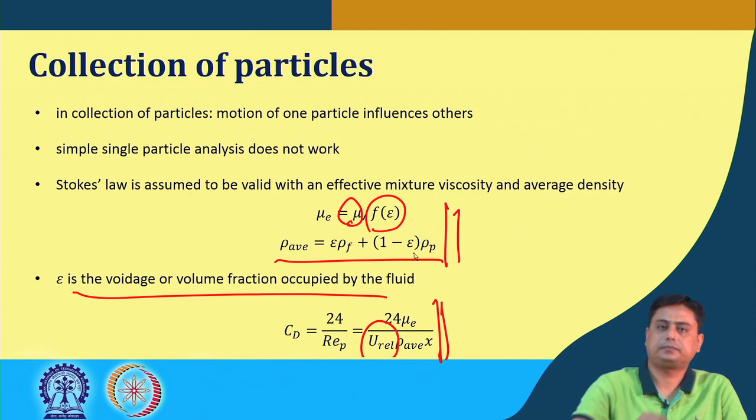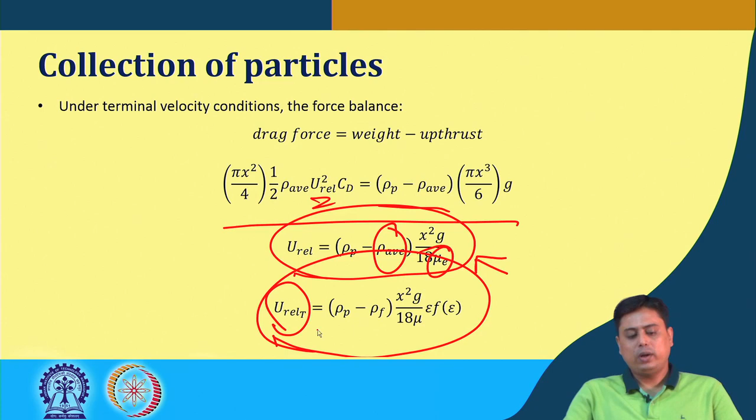Now, if we replace these two expressions in this equation, we find a simplified relation in terms of the particle dimension, the voidage, and the relative density of the fluid and the particle, where this is the relative velocity at the terminal velocity condition. Now let's compare this expression with the single particle system: this one is for the single particle, this one is for the multiple particles.

Comparing them, we find that this relative terminal velocity is the single particle terminal velocity multiplied by the void fraction, the fraction of liquid, multiplied by a function dependent on the voidage. This is called the relative velocity at the terminal condition, or specifically the hindered settling velocity, because there are multiple particles in the medium, considering the interparticle interactions and crossing of flow paths. The presence of one particle hinders the movement of the other, which is why it is called the hindered settling velocity.

Now, if we assume that the fluid and the particles are incompressible, which is logical in most cases except for gas as the fluid media, and if we assume a constant volumetric flow rate, where F stands for the fluid and P stands for the particle, then UFS and UPS are the superficial fluid velocity and superficial particle velocity respectively.

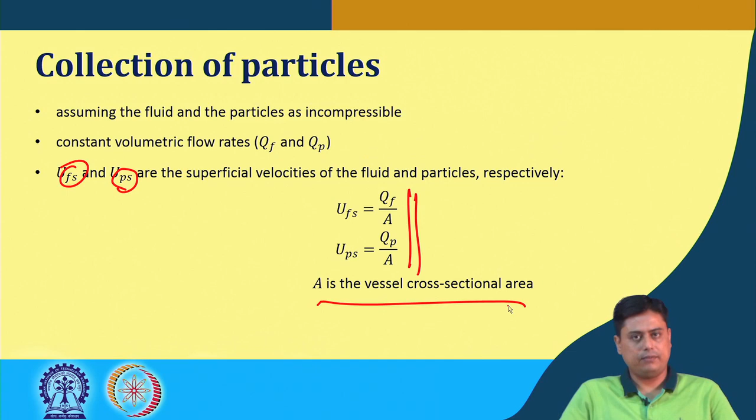Then this UFS and UPS can simply be written in this form, where A is the cross sectional area of the vessel or of the container where this phenomenon is happening. Then the flow area occupied by the fluid is AF, which is the voidage multiplied by the overall cross sectional area, and the flow area occupied by the particle is the solid fraction multiplied by the cross sectional area.

And since the flow rate is the same, and assuming, as I mentioned, it is an incompressible fluid and particle system, we can write such continuity expressions: the superficial velocity multiplied by the cross sectional area is equal to the actual velocity of the fluid, UF, multiplied by the flow area through which it is flowing. Basically this is UF multiplied by AF, where AF is epsilon multiplied by A.

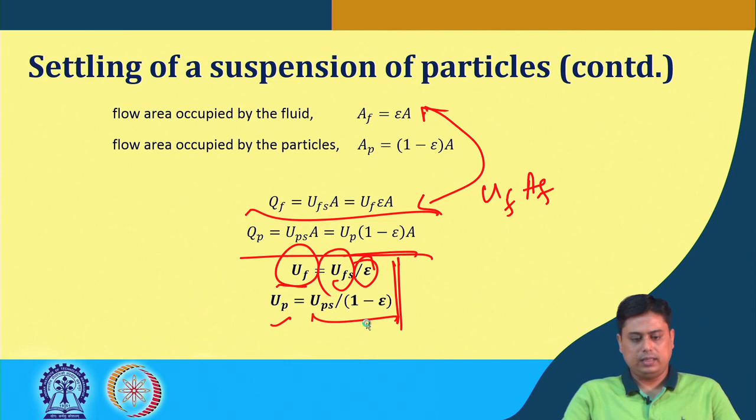Similarly, for the particle phase we can write this expression, which means we came back to these expressions we already know: the actual velocity is the superficial velocity divided by the respective volume fraction. So, similarly, the actual particle velocity is the superficial particle velocity divided by its fraction. So, what we have realized here is how this relation between the terminal velocity and this factor appeared. Okay.

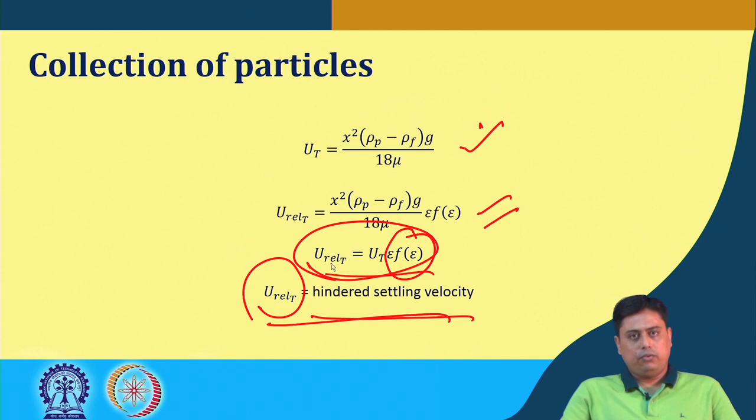Now, if we carry on with this concept for fluidization: in non-bubbling fluidization, beyond the minimum fluidizing velocity, the particle separation increases with increasing superficial velocity, but the pressure loss across the bed remains unaltered during bed expansion. If we relate this to the previous case, where particles are settling in a fluid media and both are flowing downward, the relative velocity, particle velocity minus fluid velocity, is the terminal velocity of a single particle multiplied by the void fraction multiplied by a function of the void fraction due to the presence of multiple particles.

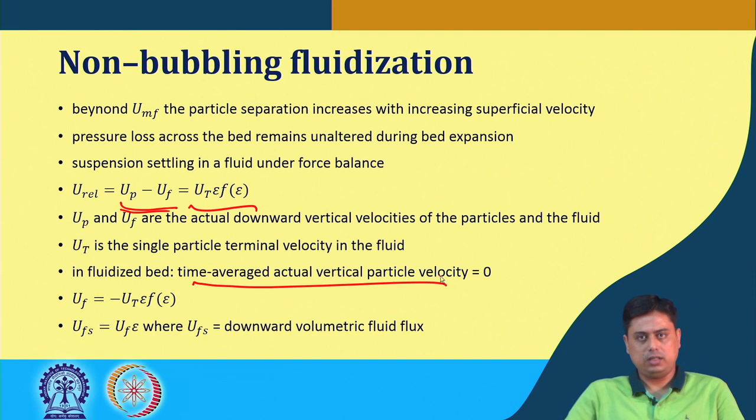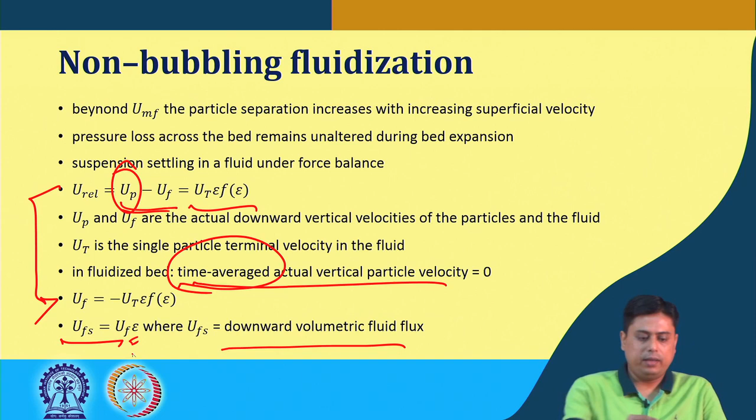Now, in a fluidized bed, the time averaged actual vertical particle velocity is 0. If we take the time average, UP is 0, and the expression simplifies to UF equals minus UT epsilon times the factor depending on the voidage. Again, the superficial velocity, or the downward volumetric fluid flux, is the actual velocity multiplied by the voidage. Applying it here, the downward volumetric fluid flux becomes minus UT epsilon squared multiplied by the factor that depends on the voidage.

Now, this is the case for downward movement, the analogy of settling multiple particles in a fluid media. The negative of this downward motion is the upward motion in the fluidized case. So the superficial velocity in a fluidized bed is the negative of this downward volumetric fluid flux. In a fluidized bed, the superficial velocity equals the particle terminal velocity multiplied by epsilon squared multiplied by the function of voidage.

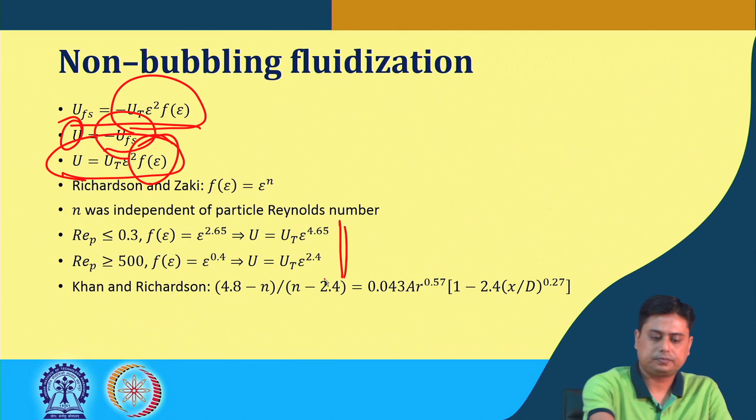Now, Richardson and Zaki proposed a relation to find this factor applied in both cases, hindered settling and fluidization. They found that n was independent of particle Reynolds number, with a value around 2.5. But for better accuracy over the complete range of particle Reynolds number, below 0.3, in the Stokes region, n is 4.65, and for larger than 500 it is 2.4, which gives the expression for u with ut: epsilon to the power 4.65, and epsilon to the power 2.4 when particle Reynolds number is greater than 500.

Khan and Richardson proposed a relation applicable for a wide range of particle Reynolds number, which introduces the vessel diameter and the particle diameter, so the influence of equipment size comes into play in calculating n. So, similar to other expressions I mentioned, correlations are available to find these required parameters. Once we have them, we can find the relation between epsilon and the fluidizing velocity in non-bubbling fluidization, that is, the relation between u and epsilon.

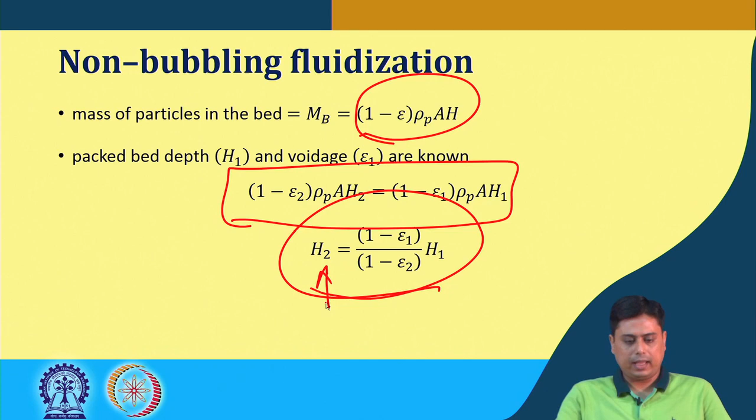This is how we can calculate the bed expansion height in case of non-bubbling fluidization by these relations, and these relations are important. Similar to these expressions there are other relations available. Several researchers have proposed these relations in a different way. These are the correlations.

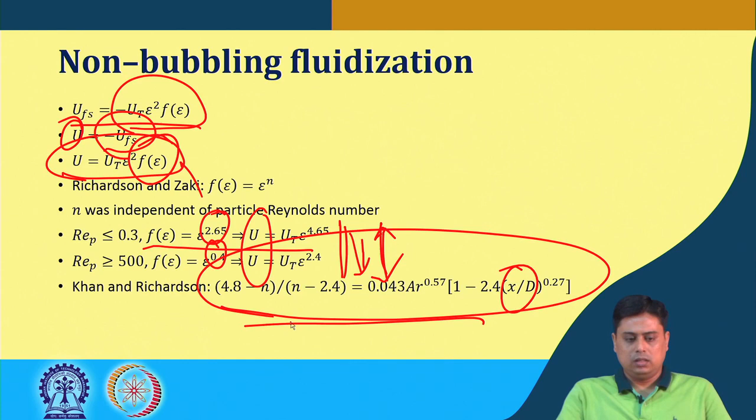Now, in case of bubbling fluidization, the expansion has been best described by a simple theory proposed by Toomey and Johnstone. They proposed that in bubbling fluidization we have two phases. One is the bubbling phase, the other is the particulate phase. The bubbling phase is mostly the gaseous phase, and the particulate phase around the bubbles is also called the emulsion phase.

Their simple theory is that any gas provided in excess of what is required for incipient fluidization will pass through the bed as bubbles. What is incipient fluidization? It is the beginning of fluidization, or the minimum fluidization, just the onset of fluidization. So, anything that you supply in excess of what is required for fluidization passes through the bed as bubbles.

Now, this is a simple schematic illustration for Geldart's group A powders when air is flown through this stack of particles. This is what happens just above the minimum fluidization velocity, and in this case, when it is sufficiently higher than that, more gas is passing through the bed as bubbles.

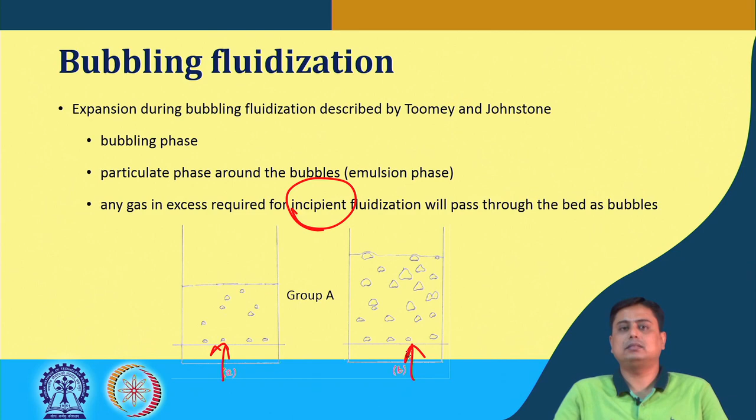Now, considering this scenario, let us say this Q flow rate was required, or UMF is the minimum fluidization velocity. If this is the minimum fluidization velocity required for this bed of height HMF and cross sectional area A, and we actually supply U multiplied by A, where U is the actually given superficial velocity.

So, the gas flow through the emulsion phase is QMF, and the gas flow as bubbles is QB, which means the gas flow as bubbles is Q minus QMF. QMF is what goes through the emulsion phase, and Q is what we are supplying for this fluidization, which is higher than the minimum fluidization flow rate.

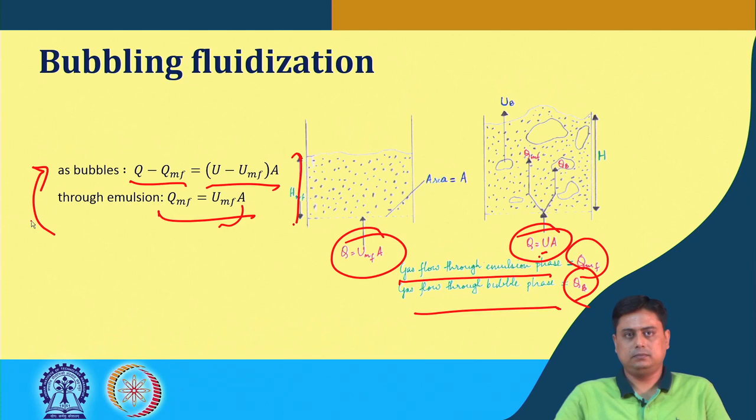So, on this simple theory we can find out what is the bubble fraction in the bed, which is epsilon b, in terms of this ratio of height differences. H is the bed height at velocity u, and HMF is the bed height at the minimum fluidization velocity.

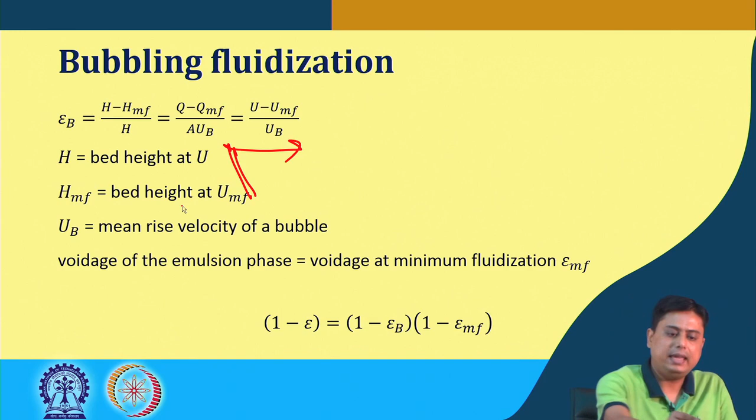This can be equated with the mean rise velocity, or this H can easily be converted to this flow rate value, and flow rate to this superficial velocity or the actual velocity and the bubble velocity. So, this requires the knowledge of mean rise velocity of a bubble, and considering the fact that the voidage of the emulsion phase is actually the voidage of minimum fluidization, then we can write this expression, which is of solid concentration or the solid fractions.

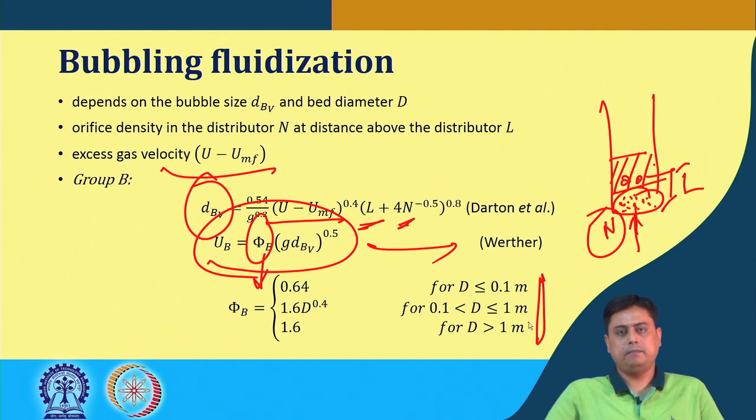And once we get that, we can calculate the bubble rise velocity by another expression proposed by Werther, where this phi b constant has this value depending on the diameter of the bed or the vessel where the fluidization is happening. This is particularly for group B type of particles.

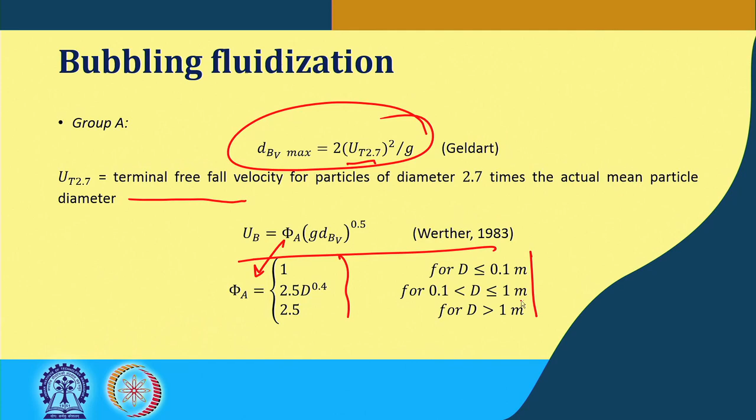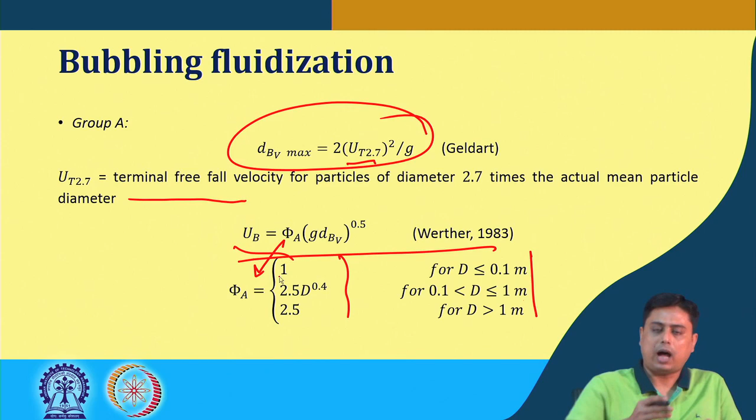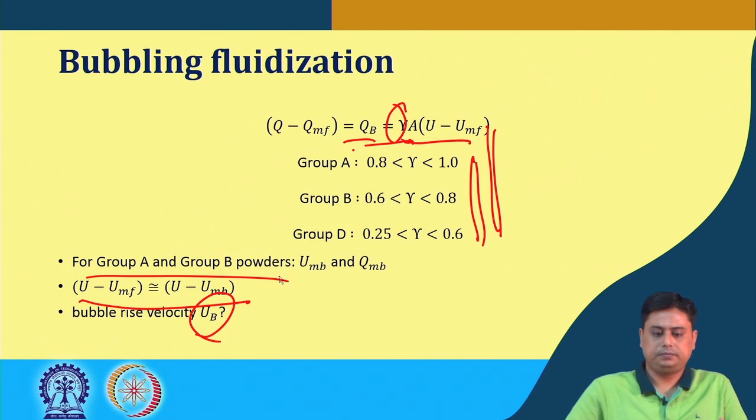So, we can calculate these expressions for the bed expansion height, and in case of bubbling fluidization we can have the rise velocity of the bubbles, and from that we can find out these parameters and the bed expansion, the bubble fraction of the bed.

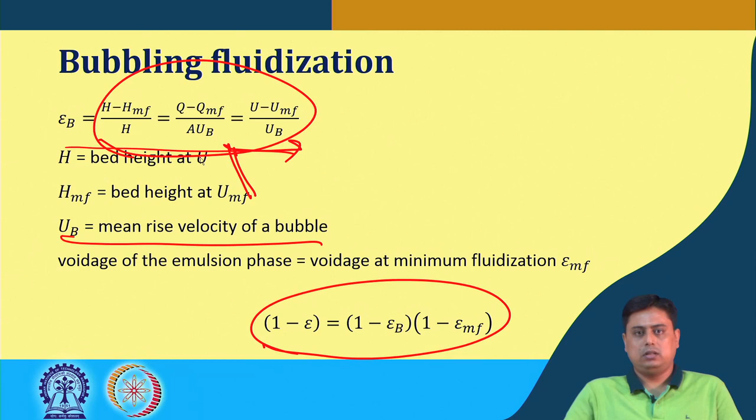So, with these concepts I will stop here in this class, and in the next class we will see a couple of worked out problems to clear these concepts in a better way, and we will cover certain theoretical topics on gas solid and gas liquid fluidization in a detailed way.